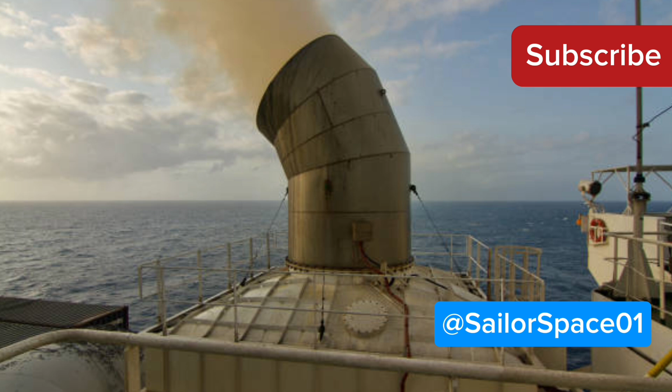And it's not just the air we breathe. The pollutants from ships also settle into the water, affecting marine ecosystems. The ocean takes a hit too. Coral reefs, which are vital to marine biodiversity, are particularly vulnerable to pollution. Polluted air can lead to ocean acidification, harming marine life. Acidification affects the ability of marine organisms to build shells and skeletons, disrupting the entire marine food web.

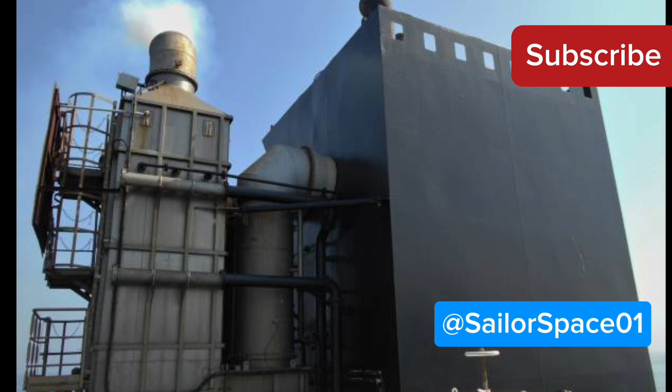So what can be done? The shipping industry is aware of these issues and is taking steps to mitigate its environmental impact. Well, that's where exhaust scrubber systems come in. These systems are designed to remove harmful pollutants from ship emissions before they are released into the atmosphere. They're like giant air filters for ships, helping to clean up their act. By installing these scrubbers, ships can significantly reduce their emissions, making the air and water cleaner for everyone.

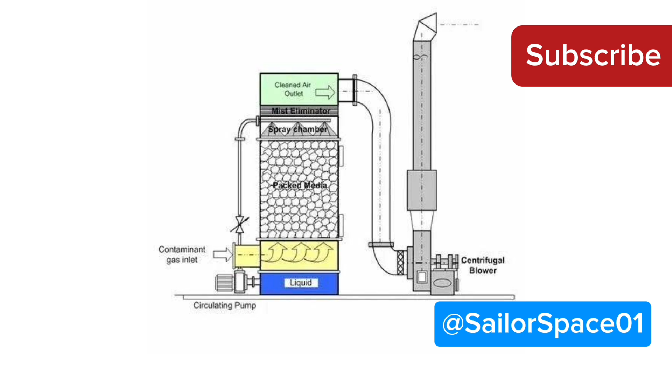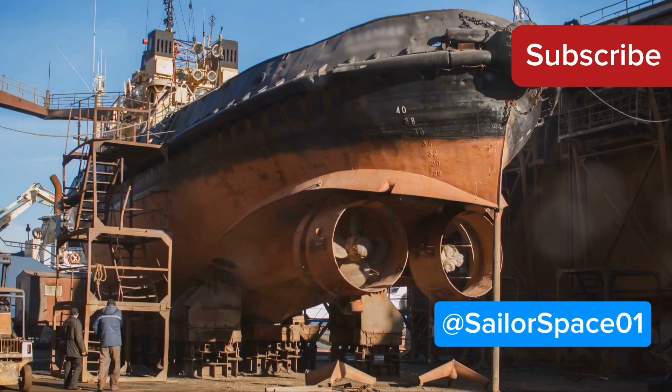Imagine a shower head for your car's exhaust pipe, only a whole lot bigger, and instead of water, it uses a special chemical spray. That's the basic idea behind an exhaust scrubber system. These systems are designed to remove harmful pollutants from ship exhaust gases before they're released into the atmosphere. They act like giant air purifiers, helping ships meet increasingly stringent environmental regulations. Think of it as giving those big diesel engines a much-needed bath, leaving the air and water a little cleaner in the process.

Let's get down to the nitty-gritty. Ship engines, particularly the massive diesel engines powering most cargo ships, are the culprits behind those dirty exhaust fumes. These engines burn heavy fuel oil, a thick, sludgy fuel that's cheap but dirty. The combustion process, while essential for generating power, produces a cocktail of unwanted byproducts. We're talking sulfur oxides, which contribute to acid rain, nitrogen oxides, a key ingredient in smog, and particulate matter, those tiny particles that can wreak havoc on our lungs. It's a recipe for environmental disaster.

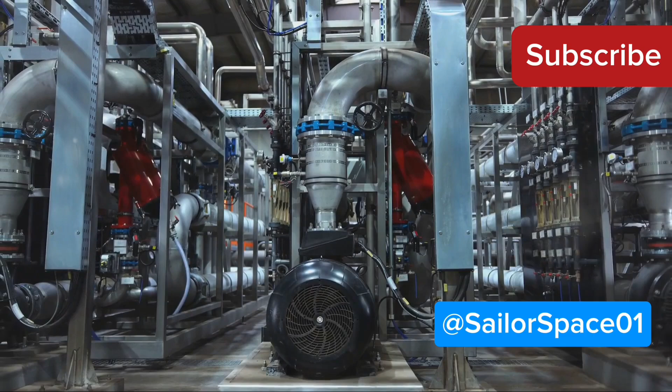Now let's pop the hood on a scrubber system and see what's inside. First, you've got the scrubber tower itself, a large cylindrical structure installed in the ship's exhaust stack. Inside the tower is where the magic happens. Spray nozzles line the tower's interior, showering the incoming exhaust gas with a fine mist of seawater or a specially formulated chemical solution. This spray is key to capturing those nasty pollutants. But there's more. The tower also contains packing material, which provides a large surface area for the chemical reactions to take place.

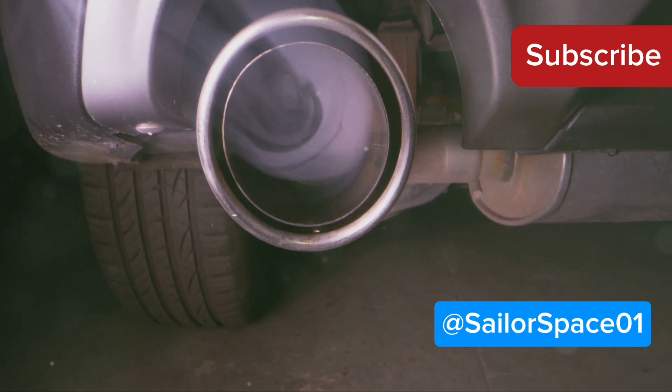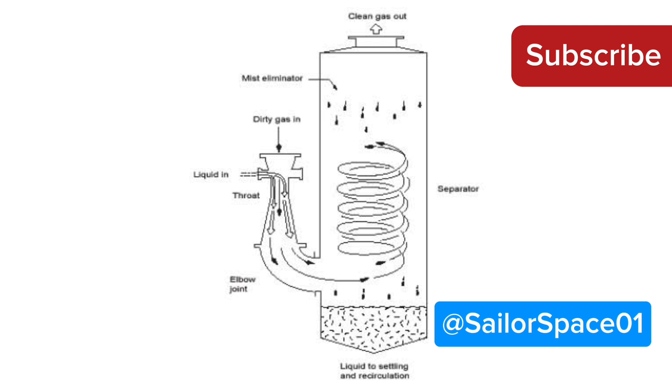Section 5, the scrub down, how it actually works. Picture this. Hot, dirty exhaust gas enters the scrubber tower, loaded with pollutants. These pollutants include sulfur oxides, nitrogen oxides, and particulate matter, all of which are harmful to the environment and human health. As the gas rises through the tower, it collides with the downward spray of seawater or chemical solution. This interaction is crucial because it initiates the process of removing the harmful substances from the exhaust gas. This is where the scrubbing action begins.

The downward spray creates a turbulent environment, ensuring that the exhaust gas thoroughly mixes with the scrubbing solution. The pollutants, particularly sulfur oxides, react with the spray and are neutralized.

This chemical reaction transforms the harmful sulfur oxides into less harmful substances, such as sulfates, which can be safely disposed of. The seawater or chemical solution acts like a magnet, attracting and capturing the pollutants, preventing them from escaping into the atmosphere. This process is highly efficient, capturing up to 90% of the sulfur oxides and other pollutants.

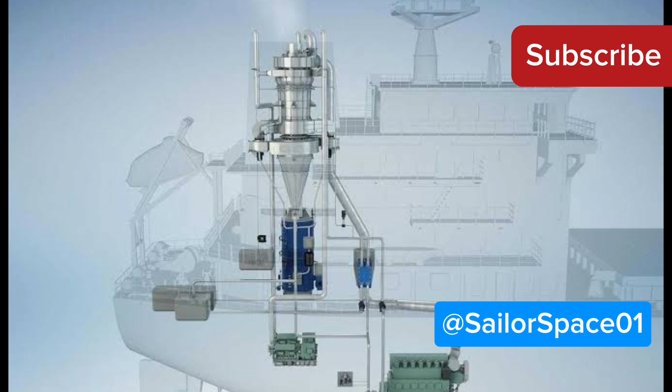The now cleaned exhaust gas, stripped of most of its harmful components, exits the scrubber and is released into the air. This significantly reduces the environmental impact of the ship's emissions, contributing to cleaner air and a healthier planet.

Section 6: Scrubbers in action, proof in the plume, or lack thereof. You can actually see the difference a scrubber makes. These devices are designed to clean the exhaust gases emitted by ships, and the results are quite visible. Stand near a ship without a scrubber, and you'll likely see a thick plume of dark smoke billowing from its funnel. This smoke is filled with harmful pollutants, including sulfur oxides, which contribute to air pollution and acid rain.

Now, [with a scrubber installed] the plume will be significantly fainter, almost invisible in some cases. This is because the scrubber has removed most of the harmful substances, leaving behind cleaner exhaust gases. That's visual proof that the scrubber is doing its job, removing pollutants and releasing cleaner exhaust gas.

The technology behind scrubbers is quite advanced, involving multiple stages of filtration and chemical reactions. But don't just take our word for it. Researchers and scientists have been studying the effectiveness of scrubbers for years. Independent studies have confirmed that scrubbers can remove over 90% of sulfur oxides from ship exhaust, a significant reduction in harmful emissions. These studies involve rigorous testing and data analysis to ensure accuracy.

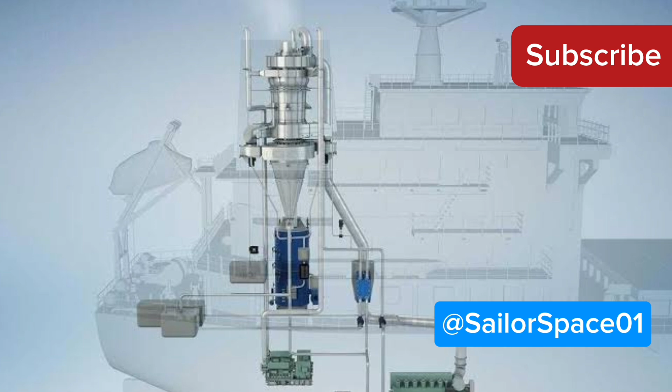Section 7: ECAs, where clean air matters most. In certain parts of the world, the need to reduce ship emissions is even more critical. These are known as Emission Control Areas, or ECAs. These areas, often located near coastlines or in heavily trafficked shipping lanes, have stricter limits on air pollution from ships. Scrubbers play a crucial role in helping ships comply with these stricter regulations. By significantly reducing sulfur emissions, scrubbers allow ships to operate within ECAs while minimizing their environmental impact. It's all about protecting air quality and human health in these sensitive areas.

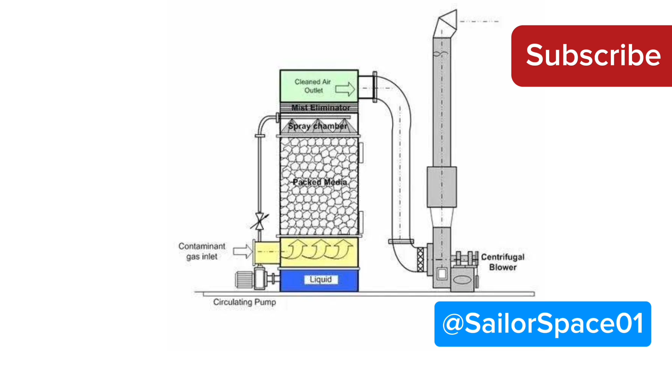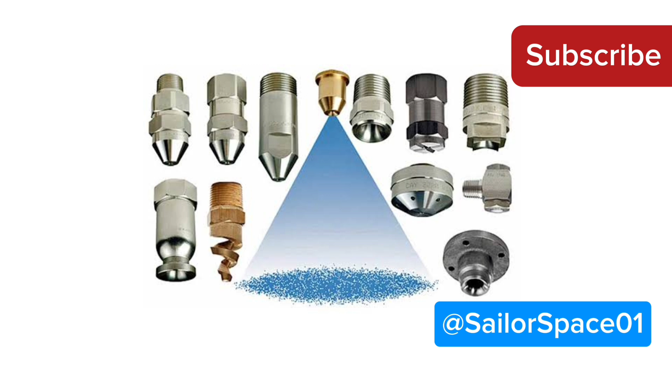Section 8: Keeping scrubbers ship-shape. Maintenance matters. Like any piece of complex machinery, exhaust scrubber systems require regular maintenance to ensure they're operating at peak efficiency. Think of it like changing the oil in your car. Neglect it, and you're headed for trouble. Regular inspections, cleaning, and replacement of worn parts are essential. The spray nozzles, for example, can become clogged over time, reducing the scrubber's effectiveness. Proper maintenance ensures that the system continues to capture pollutants effectively, keeping our air and water clean.

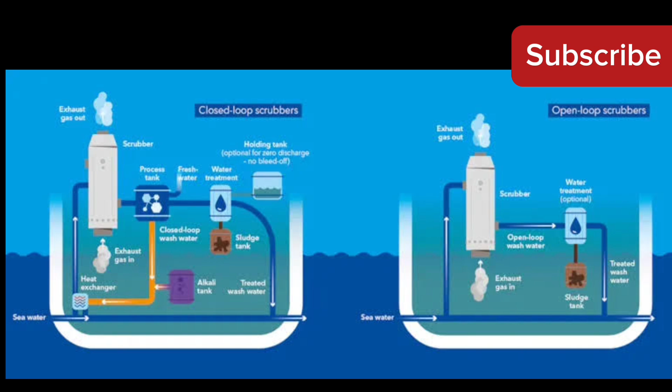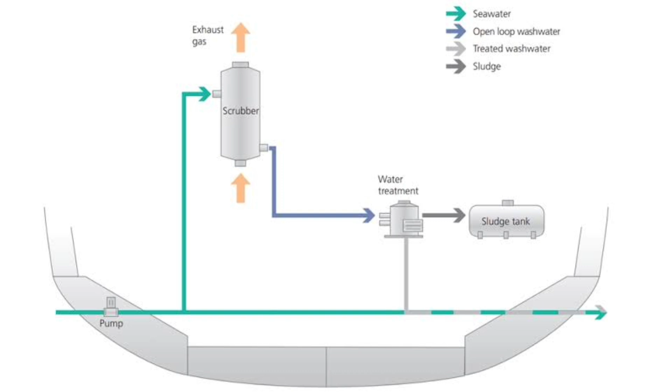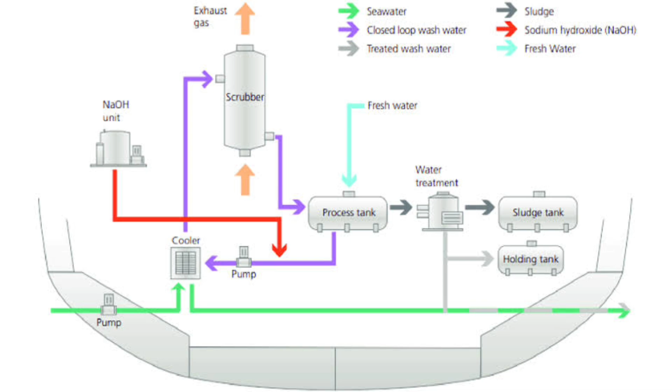Section 9: Open loop, closed loop, hybrid, the scrubber lineup. Now, not all scrubbers are created equal. There are different types, each with its own pros and cons. Open loop scrubbers are the most common. They use seawater as the scrubbing medium, taking in water from the ocean, using it to clean the exhaust gas, and then discharging the treated water back into the sea. Closed loop scrubbers, on the other hand, use a recirculating loop of chemical solution, treating and reusing the solution multiple times before disposal. Hybrid systems combine elements of both, offering flexibility depending on the operating conditions.

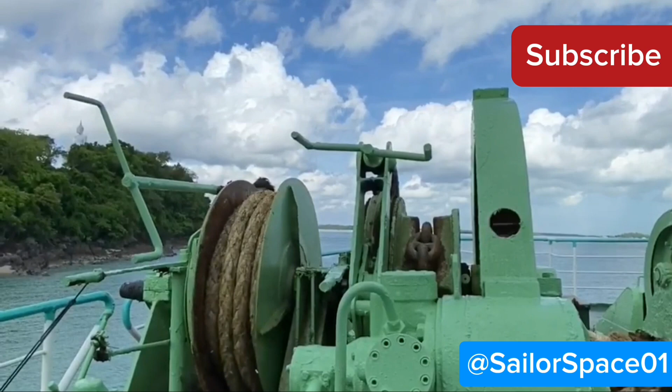Section 10: A cleaner horizon, scrubbers and the future of shipping. As we look to the future, the shipping industry faces the challenge of reducing its environmental footprint. Exhaust scrubber systems are a vital tool in this effort, helping to clean up ship emissions and mitigate their impact on our planet. While scrubbers are not a silver bullet solution, they represent a significant step towards cleaner shipping. As technology advances, we can expect to see even more efficient and effective scrubber systems, further reducing the environmental impact of this vital industry and ensuring a healthier planet for all.